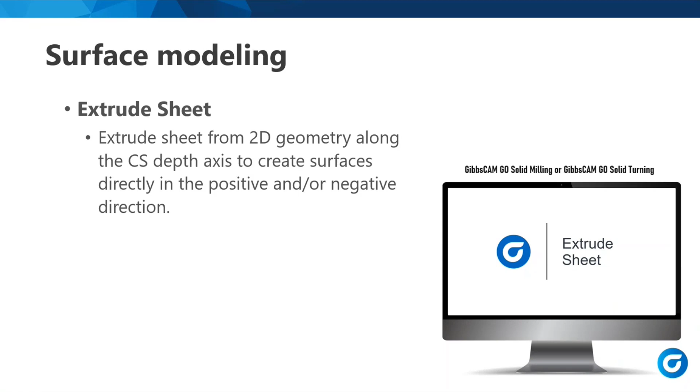So the first topic we're going to talk about is surface modeling. We added a couple things here, and one of those things is extrude a sheet. Now we can always extrude a solid, but never a sheet. So in this, if we can keep moving here, Vic, what you're going to see here is we put together some nice little things here that you can go back and look at. They're going to be, I believe, on the web. So basically, any piece of geometry, doesn't matter what it is, lines, splines, circles, doesn't matter. In the surfacing palette, we have a new button. It allows you to extrude into a sheet. And we can always do a solid, but never a sheet. So basically, it works the same way. Pick the geometry, and off you go.

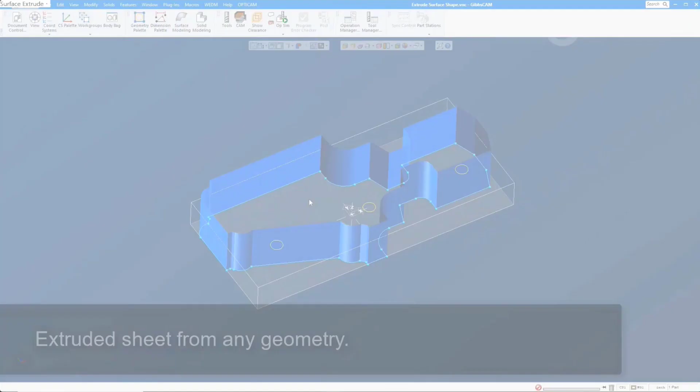Now, in the new wire EDM, this becomes important because we're using cylinders as sheet cylinders as start locations. So this is going to be very nice functionality. It's very cool.

Create a plane. Again, staying with surface modeling, if you've ever tried to take a piece of geometry and just build a surface over the top of it, or a plane over the top of it, to seal off a hole or a cavity, we made some changes to that, so now you don't have to do a bunch of work. So the way this whole thing works is, if you have some geometry like this that is not in the current coordinate system, in the surfacing palette, the very first button's a plane.

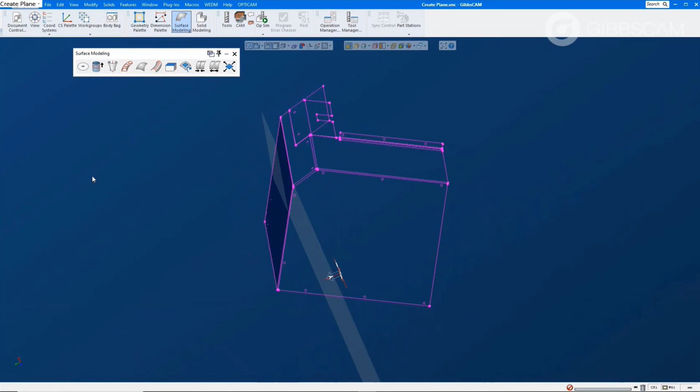Before, what you'd have to do is create a coordinate system on that point, on that geometry, make the geometry part of that coordinate system, and then create a plane. You don't have to do that anymore. As long as it's not on the current coordinate system, it will go off and trim it automatically.

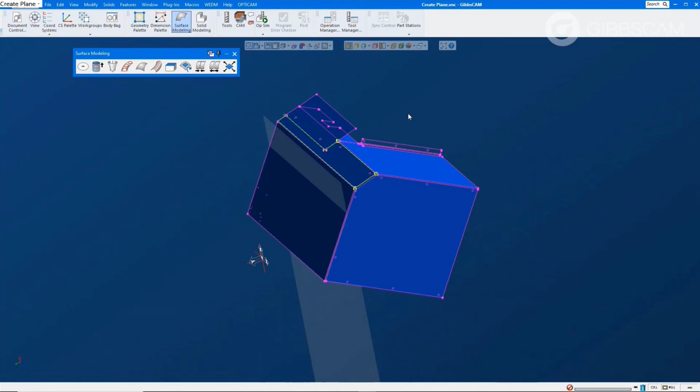So this is very cool for anybody who does this kind of stuff. I do a lot of machine sim building, and this becomes a very handy tool to patch up things or just make some simple surfaces that you can then extrude into a solid or do whatever you might have to do. So this is a very nice tool, made it really simple.

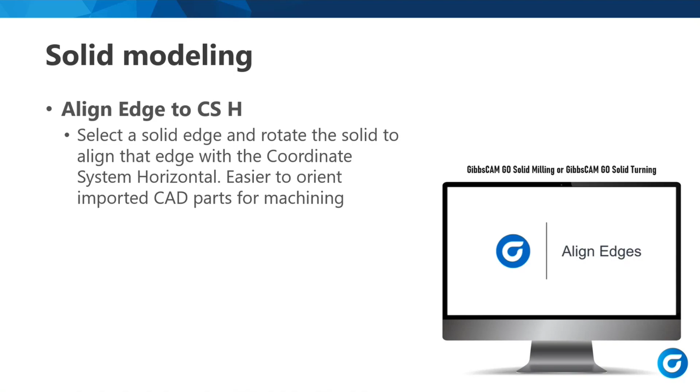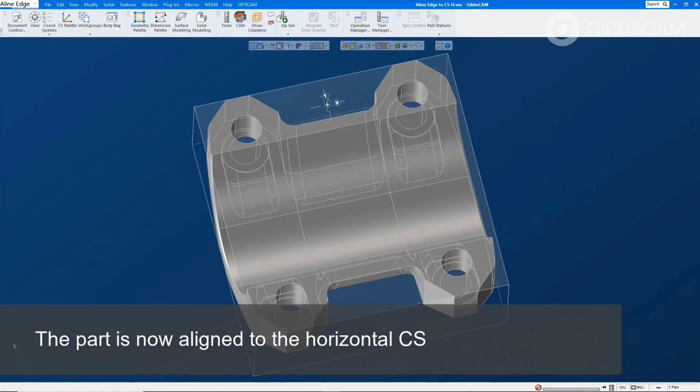Now with the new align functionality, you turn on the edges, you click an edge, and you get a right mouse click that says align the edge to CSH. So it always aligns it to the horizontal axes, but at least at this point we got the part in some orientation that we can actually use. Now you can align the surfaces and do some other things there as well.

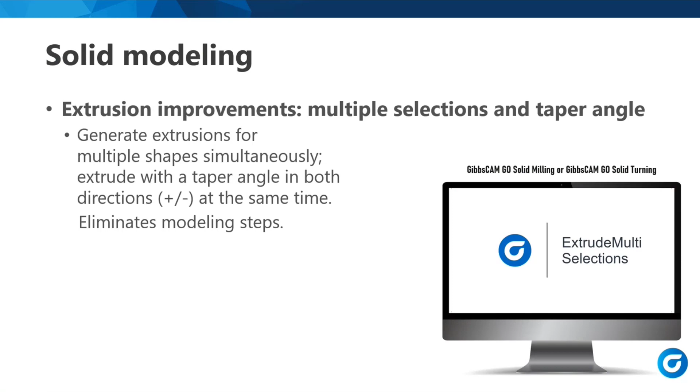We've always been able to do multiple selections to create a solid. The issue has been that you had to select the geometry in the proper order. Okay, so we have made some changes here.

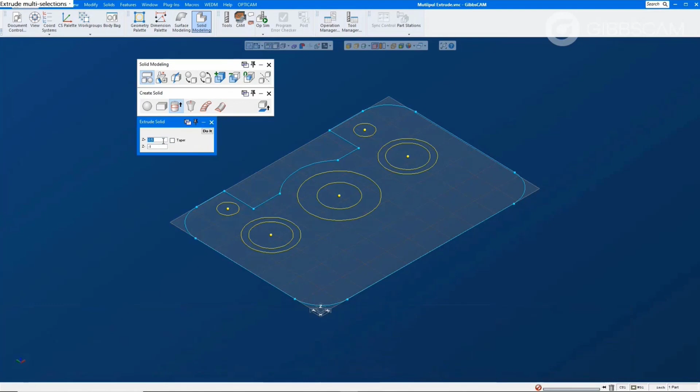You can see we added taper and you can go plus or minus, which we've always been able to do. But the key here is that the order of selection now doesn't matter, and that was always the problem. I mean, you could do this and it worked all day long, but if you didn't work from the outside in, it didn't work. Now it doesn't matter.

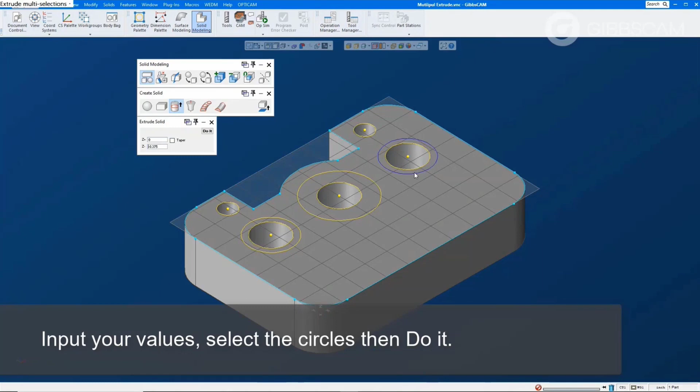We're just going to go through and build this whole part, I think it's kind of cool. The other thing that's kind of nice here is that we have two separate pieces of geometry, so we create two solids, but they become multi-lump bodies. So it makes it easy if you're building parts like this.

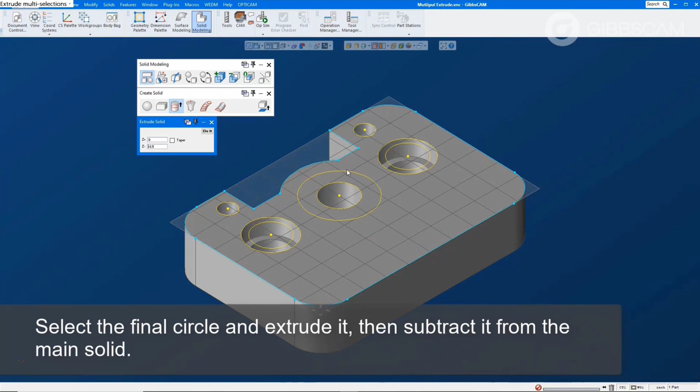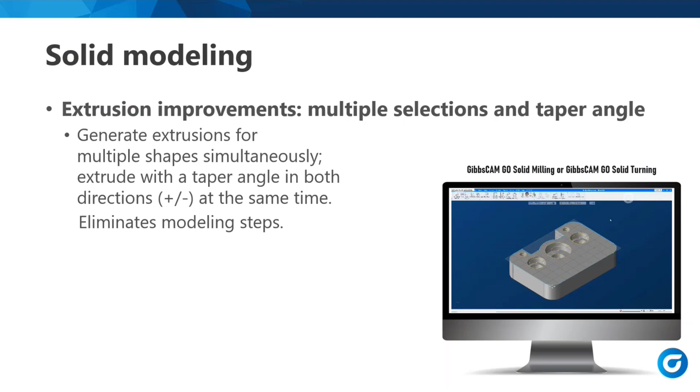Say I want to do 10 circles and subtract them from something. I can pick all the circles, extrude them, and they automatically become a multi-lump body, making it much easier to remove them. Or you can do one at a time, so it hasn't changed at all. So a couple different things here make it really nice to create solids pretty fast with geometry now, plus you can go plus or minus, and there's some taper stuff in there too.

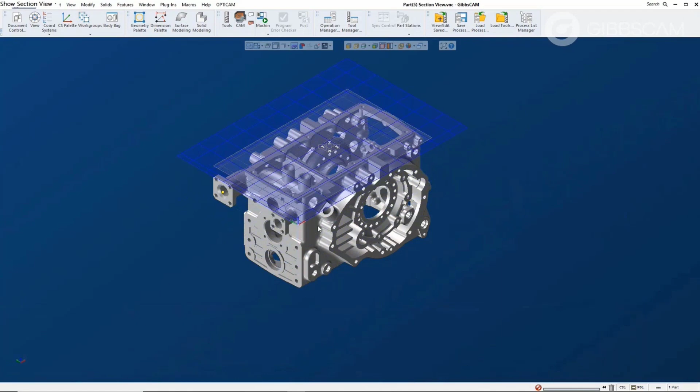All right, so section view. What does section view do? Well, this is something that allows us to slice through a complex model. So in the floating toolbar, you'll see a new icon there. If you click on it, you select the grid, the world there, and you see it turns blue. You can then drag this through the model and get yourself a section. So if there's some area in the model you're trying to see, or whatever the case may be, you can drag it through.

You can also put it in an explicit point. So in this case, I just have a point on the screen. Now I can see at that exact level and slice through the model. Okay, so maybe I was looking for something, I don't know. Having trouble, or maybe want to see inside of a part, I don't know.

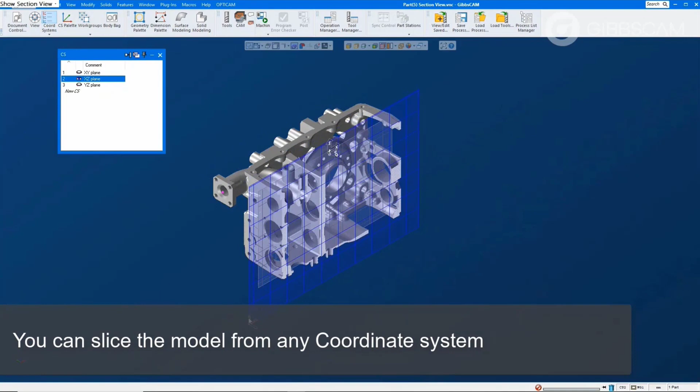Works in every coordinate system, or any coordinate system that you create. So in this case, we just have the standard coordinate systems, but if you would create one on an angle or deeper inside the part, whatever the case may be, it works throughout without any issues. It's pretty nice functionality to get in there and see the inside of a complex part.

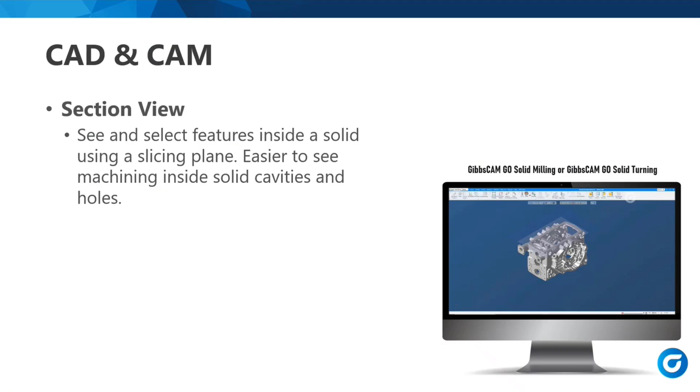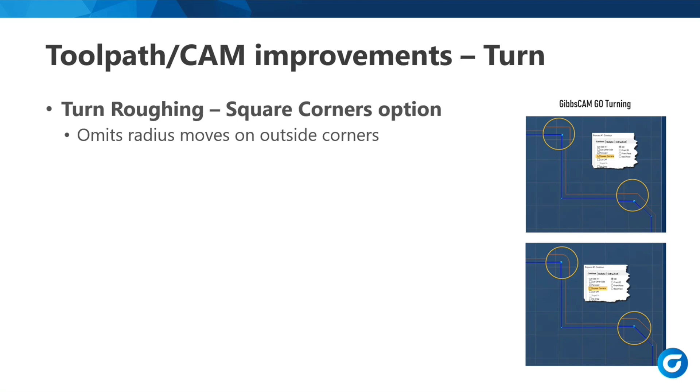Let's talk about a couple of tool paths. For turning, we've always had a radius on the corner in our toolpaths, with no way to make it sharp. Now there's a simple switch inside the dialog that lets you change it, and you'll see the corners are all sharp now. Instead of going around the corner, you get a nice sharp move.

Now this one is really nice. They've taken a few different things and combined them together, which is really handy.

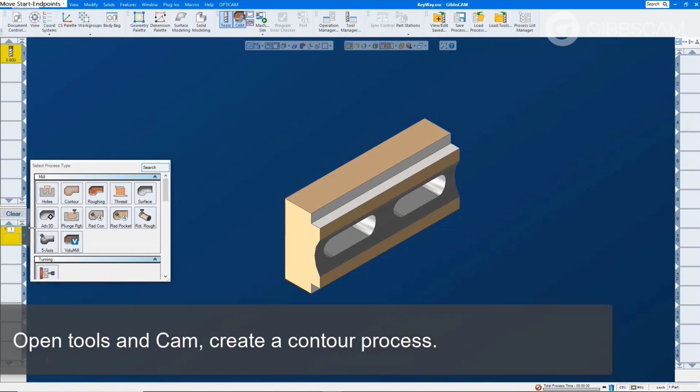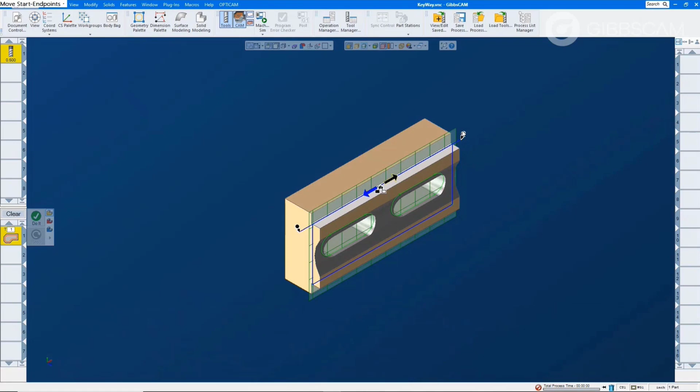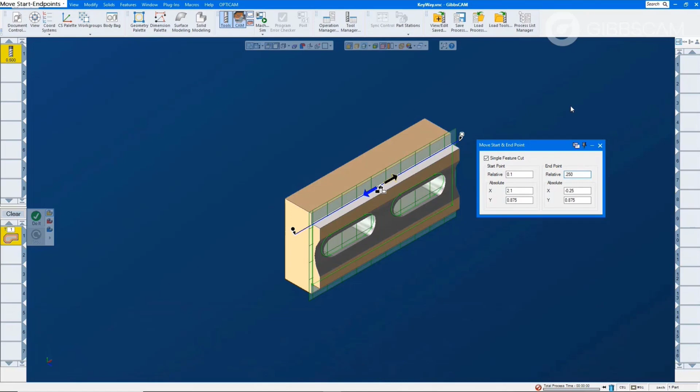Typically what everybody does, let's create a simple contouring process, then turn on the profiler to cut this slot. We'll drag the markers. In this case I just want to cut that top edge. So what we've done is move start and endpoint combines the functionality, so you can say I want a single feature relative to the start and relative to the end, which is very nice. Or if you knew absolutely where it was in X and Y, you could type that in. They give you a couple more choices and put it all together in one dialogue, which makes it really nice. That's a great added piece of functionality.

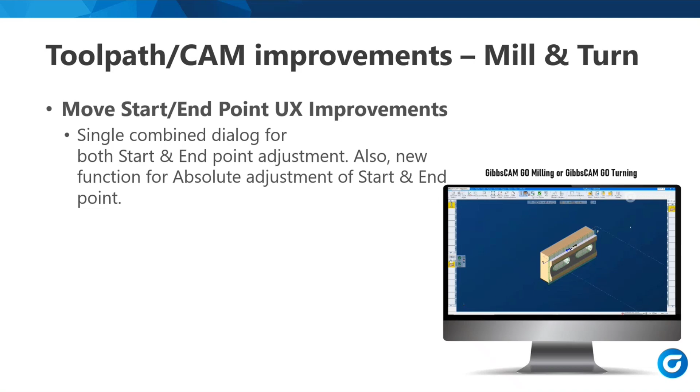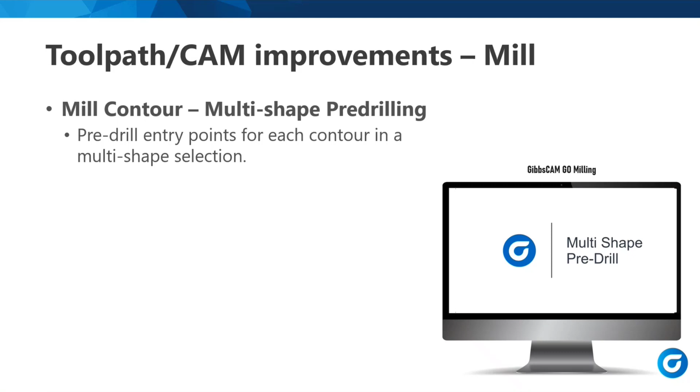Multi-shape pre-drilling is something people have been asking for. I've been with the company a long time. Here we have some geometry, and you could always pre-drill with GibbsCAM, but with geometry you could never really do it with multiple pieces of geometry.

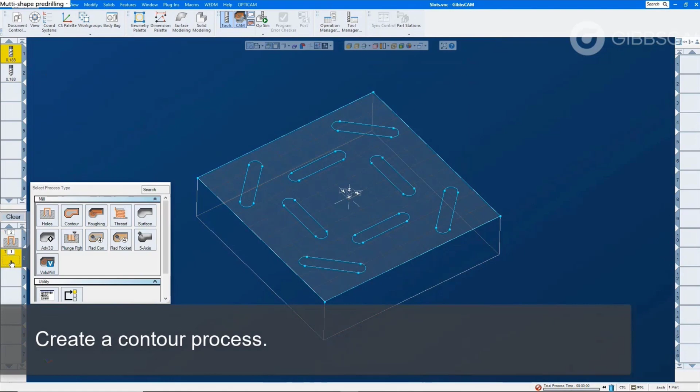In this case I'm just going to set up what I would normally set up as a pre-drill. It always works with solids because that makes it pretty simple. We'll set some depth just to have something, and you all know we changed the way we do offsetting, so you can choose what side, inside, outside, whatever you want. Then I'm going to go along and just pick the geometry.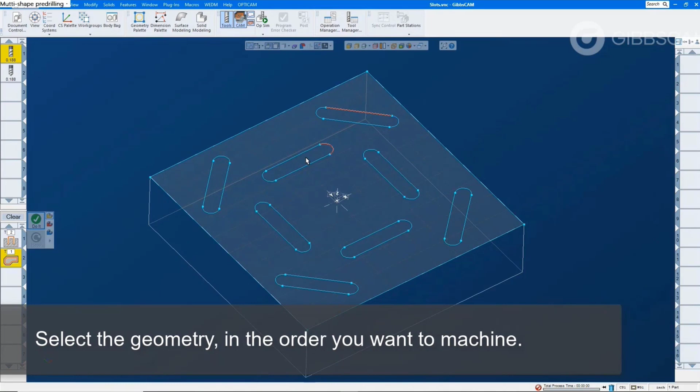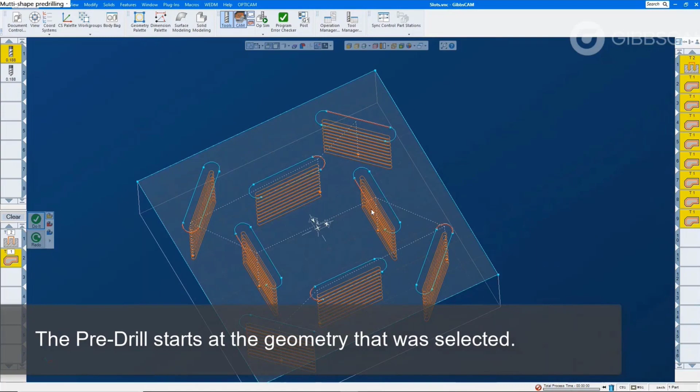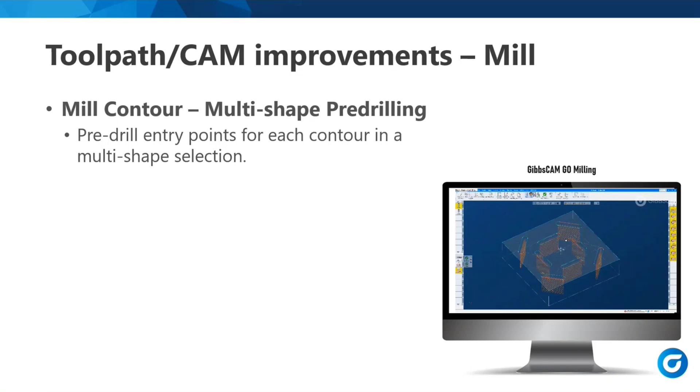Now, pay attention to how I pick the geometry. If I pick that line, and that radius, and that radius, and that line, and that line, and the radius, and the radius, and that line, then when we run it, pay attention to where the point starts. The drill starts on that line, or at the radius, or on that side of the line. So it matters which piece of geometry you pick — it determines where it's going to start, which I think is really cool. You can pick and choose what you like to do there.

This is very nice — massive improvements in the VoluMill. The toolpath is definitely faster. So when you have a part like this, the time it takes to actually generate the toolpath is extremely faster. That's pretty cool.

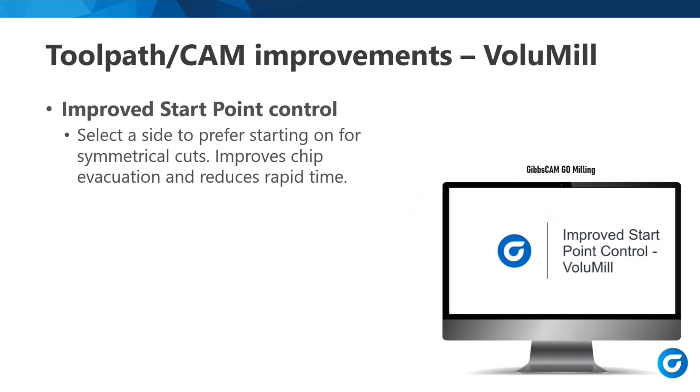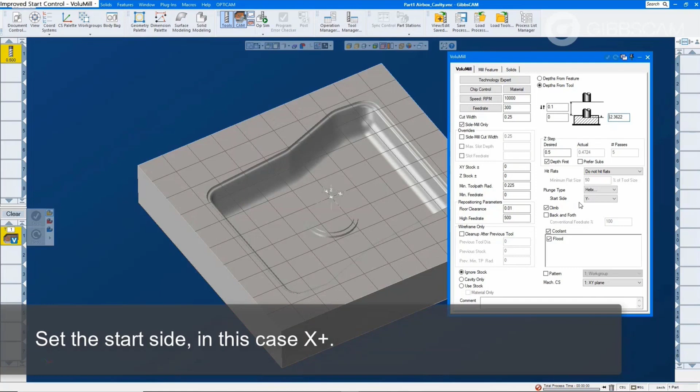The other thing, staying with VoluMill, is improving where it starts. This isn't going to be 100% — I'm not going to lie — but at least it gives us a hint on where we want to start. They've added something here because of the nature of VoluMill. We'll set our depth, and do normally what you'd do with VoluMill, but now down here we have a start side. I want to say start on the X positive side all the time — no matter what I do, start on that side of X, or it could be that side of Y, whatever. I just happen to choose X, and you can see the helix is on the positive side of X.

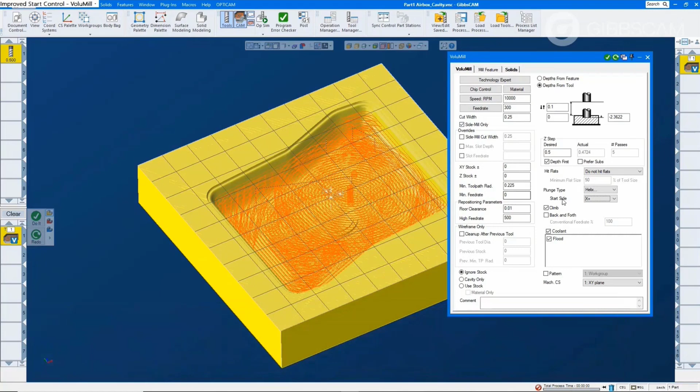Let's show you that it actually works. We'll change it to X minus, and we'll redo the toolpath.

And you can see it's pretty fast actually, because that's actually real time. We didn't cut that up at all. And now you can see that it's on the other side of X. So, nice functionality, it's going to help you out a lot. I know a lot of guys use VoluMill, so I think this is really nice.

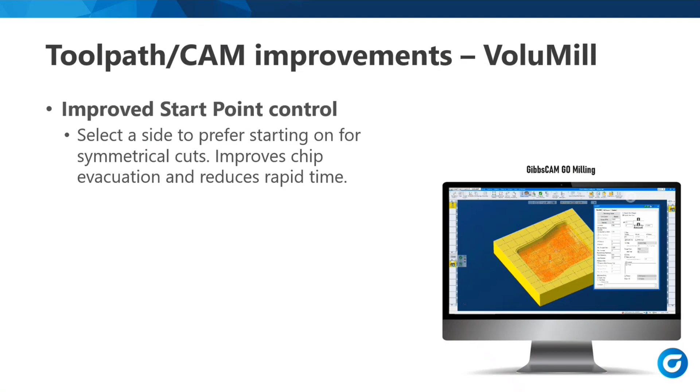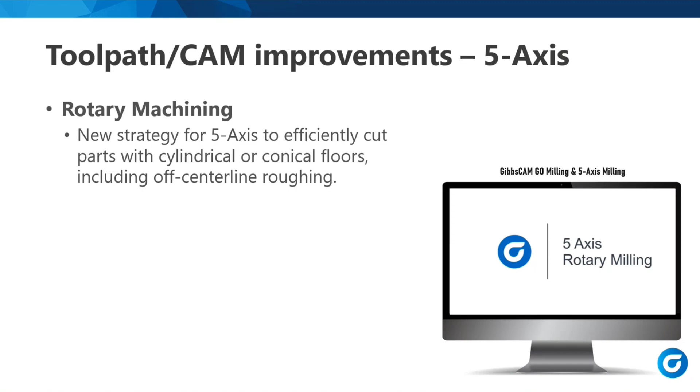All right, 5-axis. This is brand new functionality. This rotary machining is really, really kind of slick. If you're doing any kind of screws, big threads, this is really, really nice.

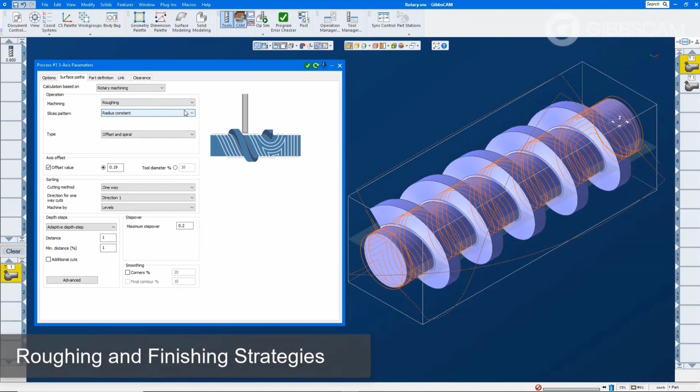Now, we want to keep in mind that this is for roughing, not necessarily for finishing. You have a rotary machining roughing. You can do radiuses, this is kind of neat to mess around with. You can do spiraling or just offset, it just depends what you want to do.

The really nice thing here is the ability to offset in Y. And everybody thinks that, hey, let's make these screws, we'll just cut it on center. Yeah, not so much, a lot of times that doesn't work.

So here we're going to pick all the surfaces. You can set the axis of rotation, so depending on what type of machine you have, how your axis is set up, and it will go off and generate a really, really nice tool path.

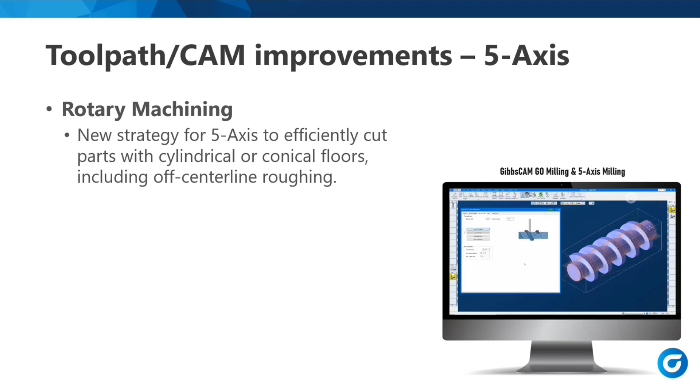So for deburring, also in 5-axis, this is very cool. This is something I think it needed from the beginning. And the fact of the matter is now you can do a step over, so you can either do it a constant width or a radius. It just depends what you want.

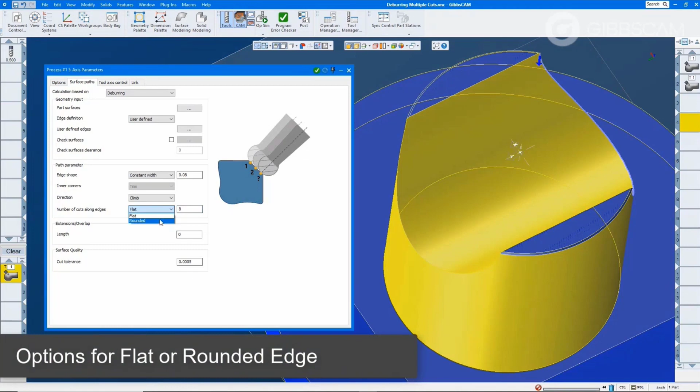So in this case, we're just going to do a flat and we're going to say 8 cuts. Now, it's not going to give you, like if you want an 80 thousandths flat, it's not going to give you that. It's going to take 8 cuts and divide it up and give you what it gives you. But at the end of the day, you have a choice of either a flat, which is it's cutting right now, or actually it's going to cut a radius, which again is very cool.

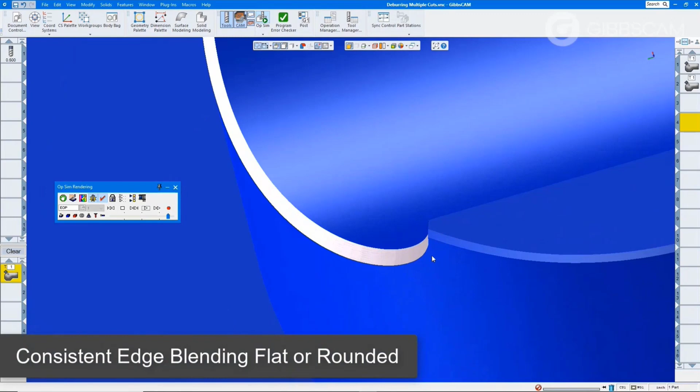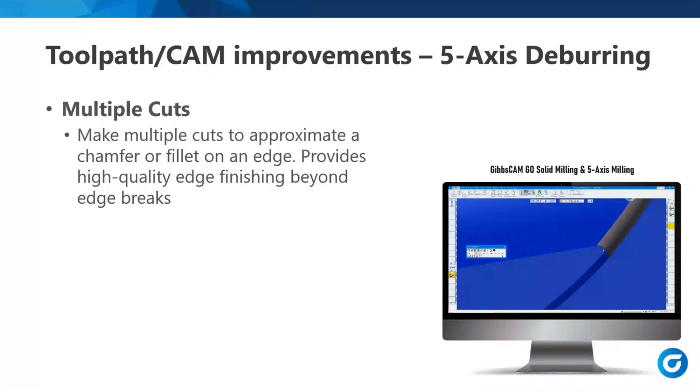So now you have a choice, so it's either a flat or a constant blended edge. This is a very, very, very nice improvement to the software.

Okay, contact point. What this allows us to do is to set a distance so that you can use the side of the tool to generate a deburring cut, as it were.

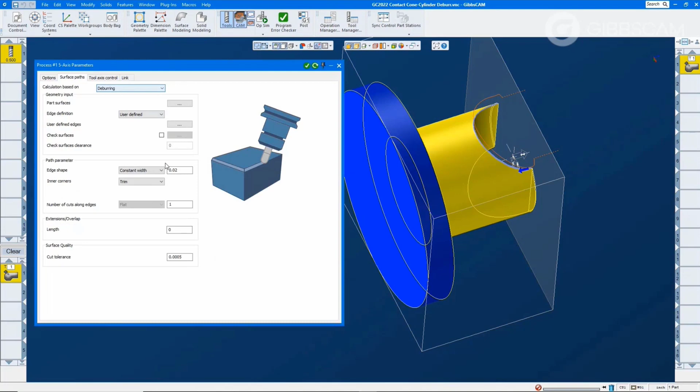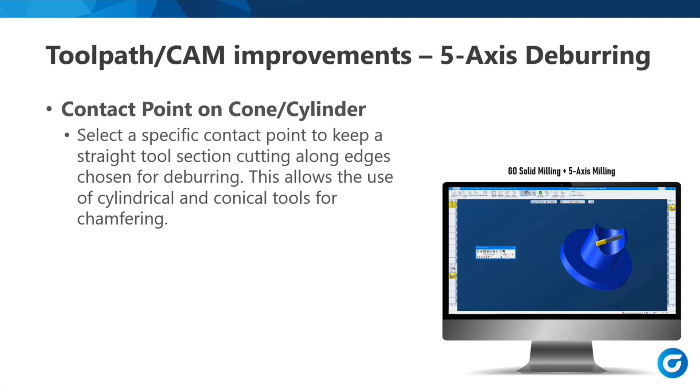Okay, so we're going to go in here. We're going to set this up, deburring, and make sure that it's set down here, you see? So what that quarter inch is going to be is past the edge of the part, or the end of the end mill is going to be a quarter inch past. And you can then use the side of the tool to generate the deburring, which is, I mean, people want to do that. So I think these improvements are going to be very useful.

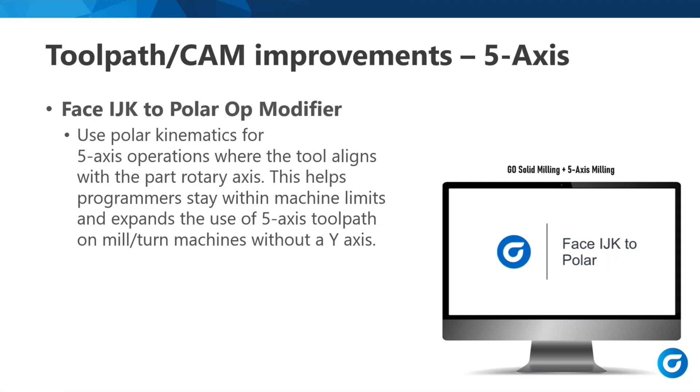Okay, polar IJK. Okay, this is a bit hard to explain, but basically if you have a machine that doesn't have a Y-axis, this will allow us to do it, and all these are basically deburring, allow you to do this without having a Y-axis on your machine.

So basically you're going to set it all up, cut it, tool axis control. It needs to be set up in three axis. And then what we have is an op modifier that you go in and you say, hey, I want you to change this. And you say, do it.

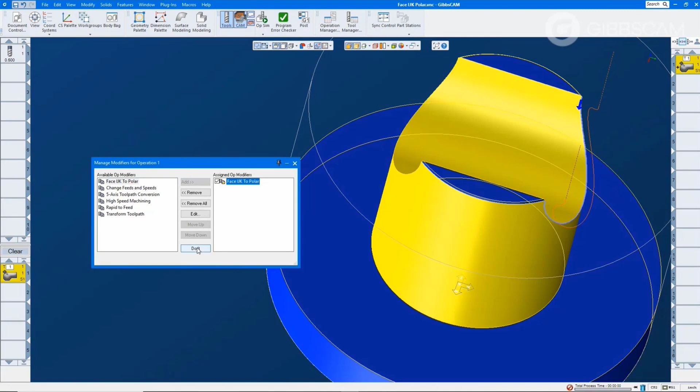And what that's going to do then, instead of the tool driving along, it's actually going to drive the rotary axis. So you'll see this in the simulation where the result is the actual rotary axis is moving, which if you don't have a Y-axis on your machine, it's not possible to do what we just did. So this at least will give you the ability for that rotary axis to move.

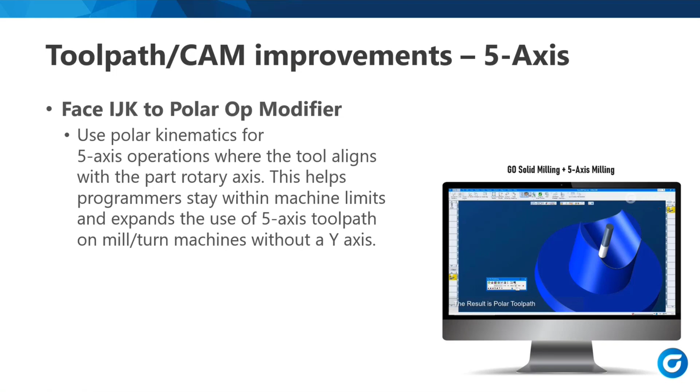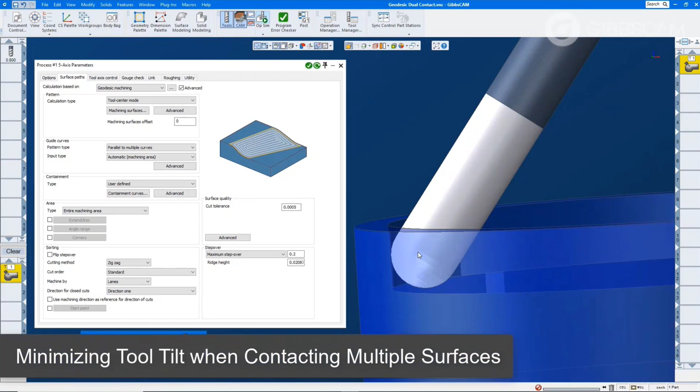Okay, dual contact. Again, this is one of these, when you're doing geodesic and you want to select two, like it's going to, the ball mill is going to touch two different faces. It basically adjusts the tilt. And a lot of these things are hard to show, I give Dan Arrington a lot of credit. Some of these things are difficult to actually show, very specific to specific things that you're trying to accomplish. So that just helps us keep the tool a bit more stable and minimizes the tilt.

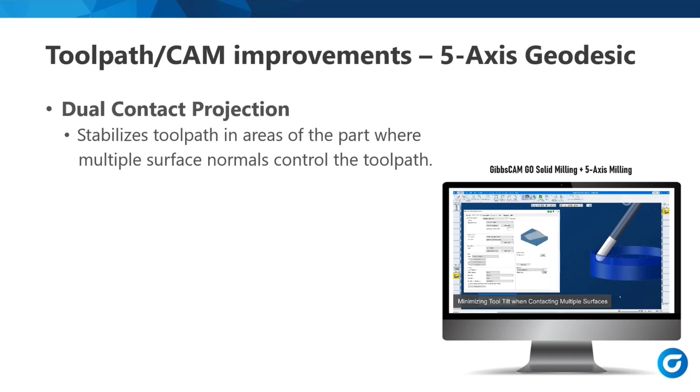Again, automatic tilting — these things are difficult to show, but for collision checking, propagation direction is kind of cool. If you use geodesic, this allows you to draw some geometry. Maybe you're cutting a surface and you only want to cut on one side of it. You can draw a line or a boundary and say I only want to do one side, not the other, and it does that pretty well. Or if you drew a box down the center, it would do either side of the box, or just do what's inside the containment shape. That's a really nice piece of functionality if you're using geodesic.

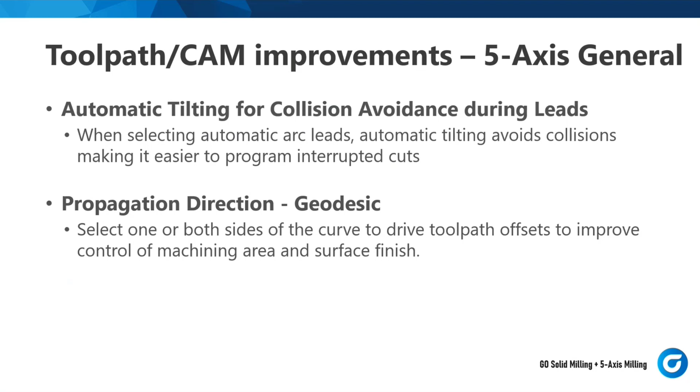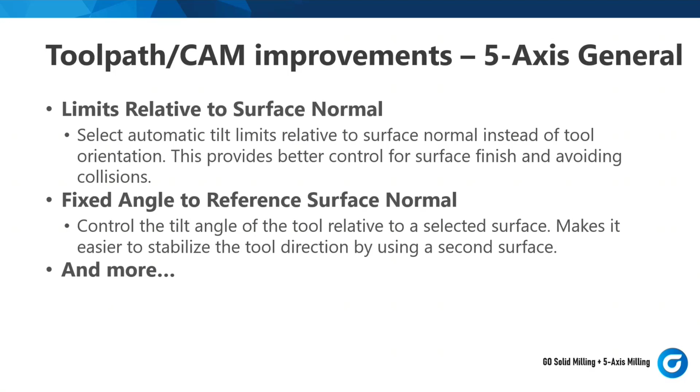Again, these are all surface normal tilt limit things. If you're really into this, trying to get these things dialed in, you can get in there and mess around with controlling all the tilt angles and all the different things in 5-axis. There's a ton more little odds and ends in there that you can read in the documentation and go through. The big ones are the rotary, the deburring, and the geodesic stuff, which is really, really sweet.

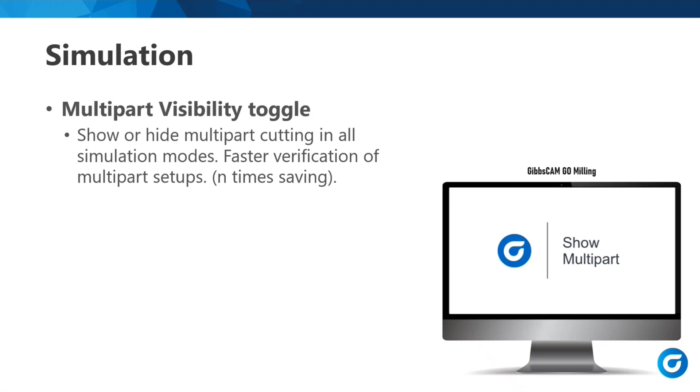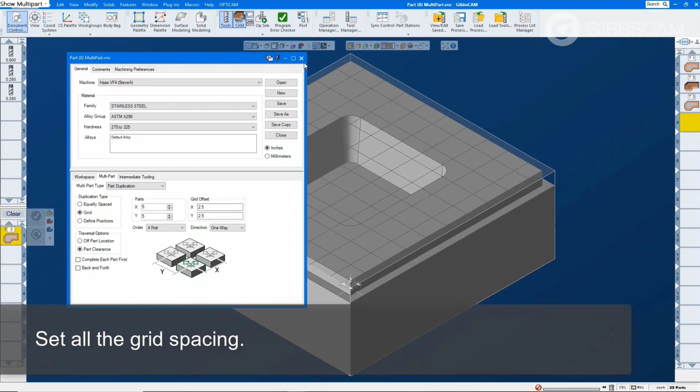All right, simulation. This is something people have asked me a thousand times for, so we've added something in the simulation that should help. Let's say we have this part, a simple part — most generally when we're doing this kind of stuff, they are simple parts. Maybe they have lots of tool paths, or maybe in some cases you have 100 parts in a grid. Well, I really don't want to watch 100 parts render because I don't need to. I only need to make sure that the first one is right.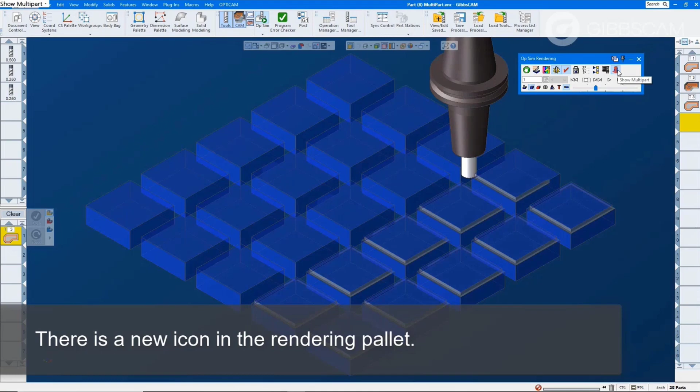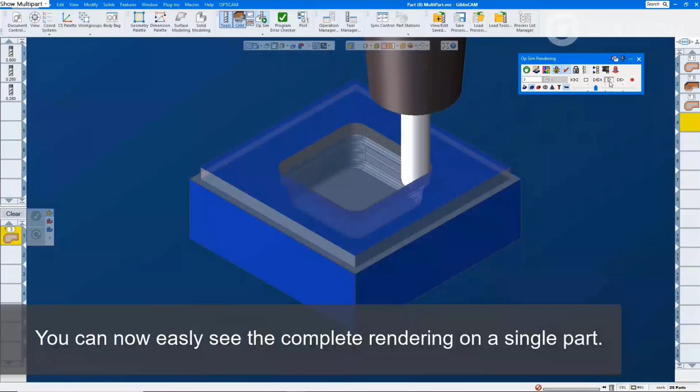So you'll see in the rendering it looks like a little tombstone. If you click on that, it turns all that off, so you just have one single block. Everything is still there — it just turns off all the rest of them for rendering purposes, and allows you to go in and just see this one block. This makes it really nice so you don't have to watch, and it works in tombstone management — it works everywhere.

Okay, again for turning, we've definitely sped up the sub-spindle machines, so the 3D material on the sub-spindle is much, much better. We've also sped up the simulation for MTM, and also faster start at op. I think that's what we're going to talk about next.

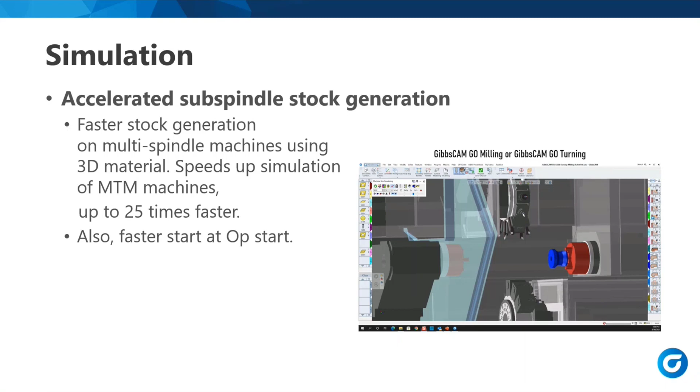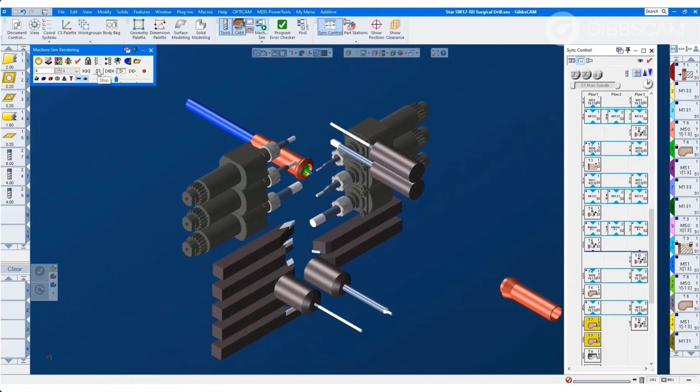Okay, so start at op — this is very cool now. We've always been able to do this a bit with milling, but not much with turning. What this allows us to do is set an operation up. Let's say you build a bunch of tool paths, but I don't want to see the whole thing run — I see part of it, I know it's good, I only want to see the end of it.

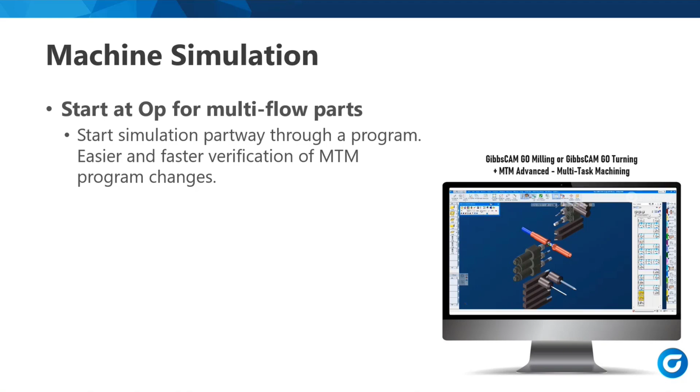So now in turning we allow you to go in and set a stop, so it will jump to that operation that you say, hey, start at this operation, and we'll jump there. Everything before that will be shown rendered as a completed part. We never really did it in turning — we've had it in milling, but not so much in turning. But now it works across the board, and it works pretty good. I use it all the time now. It's very, very nice.

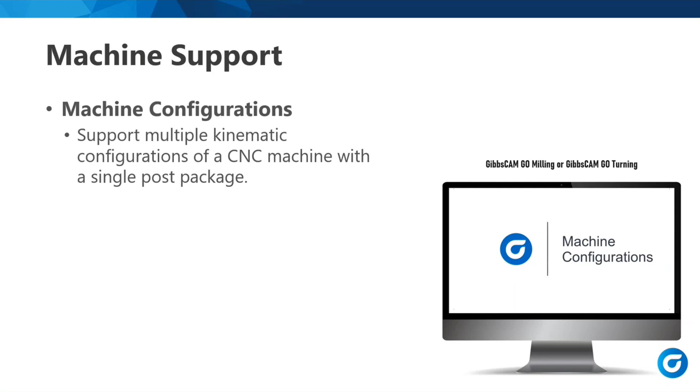Okay, machine support — what does this mean here? Machine configurations. Now this is another really big part of the kinematic part of this release. Part of this is if I have a machine that has multiple configurations — meaning, in this case, a machine that may have a trunnion. But that trunnion doesn't reside on this machine all the time. We've given you a configurations button.

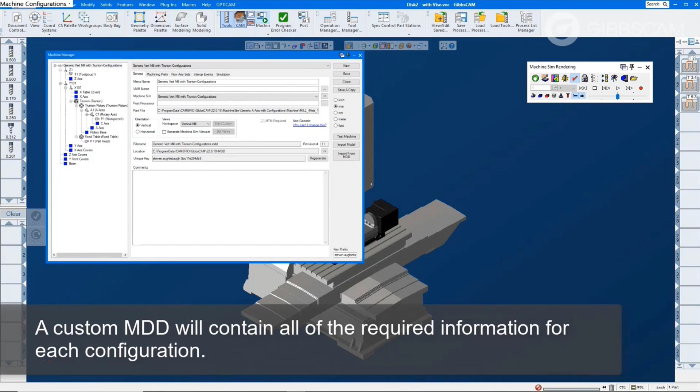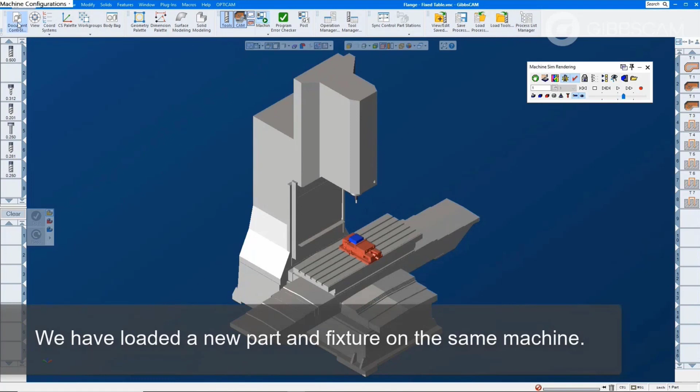The MDD is what handles all this stuff. So in the MDD you would create a configuration that has a trunnion, or nothing, or angle plates, or whatever the case may be. In this example, this is just a 5-axis trunnion that we're running today, but maybe tomorrow we need to tear that off and just put a vise on there. In the past, you would need a whole other machine sim, a whole other MDD. Now we just switch to a fixed table, and now we have a completely different configuration. So one setup of machine sim, one MDD, one post, and you're good to go. This is really, really kind of cool.

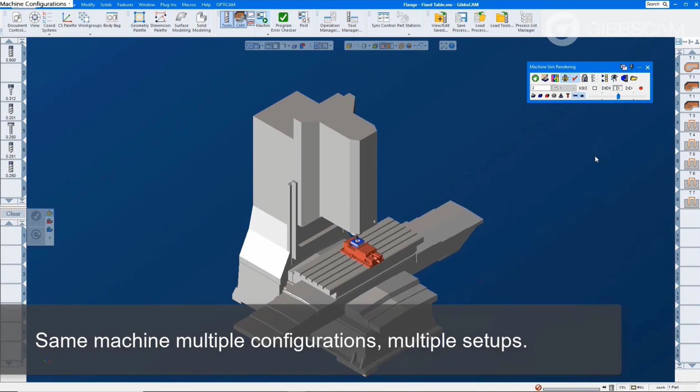Okay, and this is for a simple machine. Well, let's say we wanted to talk about the really complex stuff — and a shout out to Andy, because I didn't do any of this, I'm just talking about it. So in this case, we have multiple configurations.

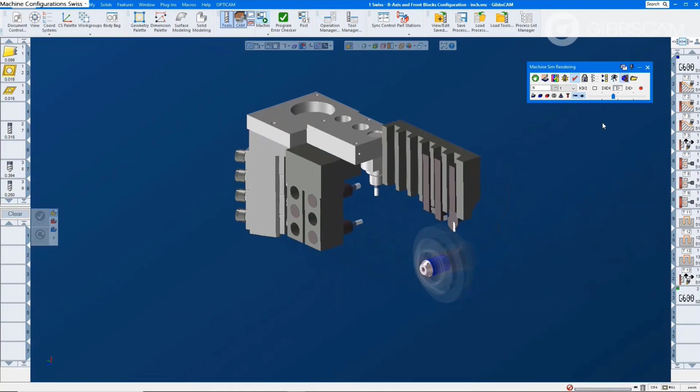Okay, so we want to show that we have tools, we have tool blocks, we have B-axis on this Swiss style machine, and we're just going off and rendering it, and that looks pretty cool.

So on the next setup, maybe we just have a thread whirler. We'll go in and say, hey, no tools, just show me the thread whirler, that's all I want to see. So now you see all this stuff got taken away.

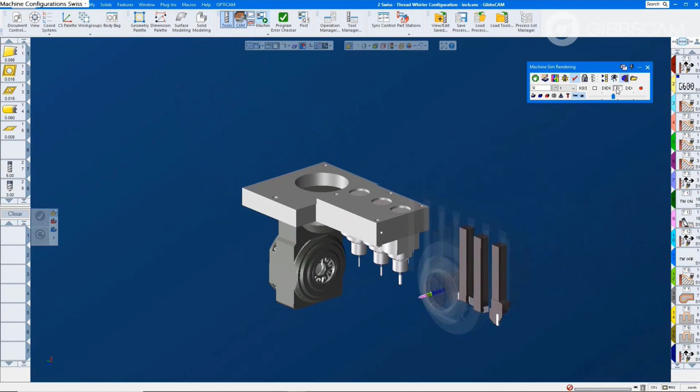Now in the past, you would have had to have a whole other setup, you would have had to have a whole other MDD. Don't have to do that anymore. This is very, very cool functionality here. This is really, really powerful stuff.

And again, I'm going to switch it back. Let's go ahead and put the B-axis back on. Again, just trying to show you different combinations of things that you can have for this configuration stuff.

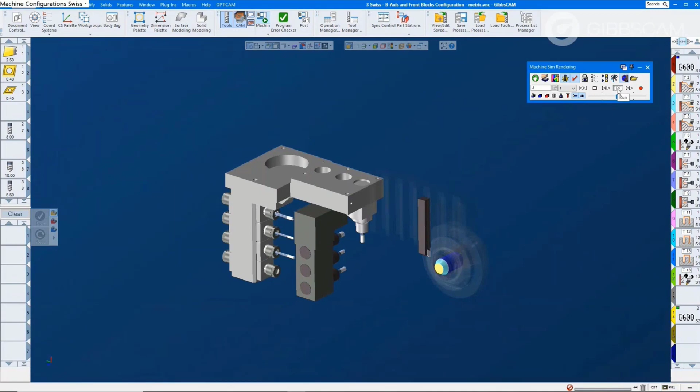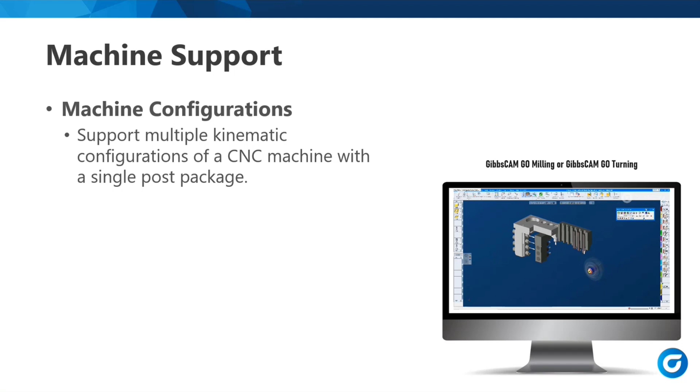It's very nice. Again, you have to go in and do some things in the MDD, but at the end of the day, if you're doing this type of stuff, you have multiple configurations. You want to do rotaries or angle plates on a machine, or whatever those cases may be. In this case, we're changing B-axis and all kinds of really cool things. Works really well.

Okay, so for milling machines at the moment, we do a lot of stuff now with these mill-turn machines, where you have a mill that has 5 axes on it and it can do turning. We can now go into the MDD and switch on.

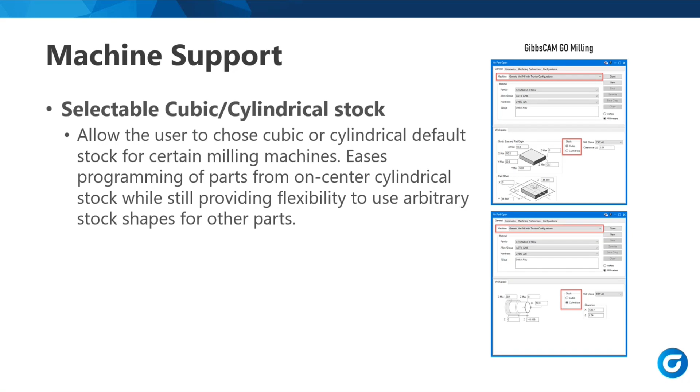So on the milling machines, you can have cylindrical stock automatically. As you can see, you can pick either cylindrical or a square piece of stock, which is kind of cool. Otherwise you have to go in and create the stock and do all these different things. In this case, it basically takes care of it for you.

Okay, that is the highlights of this version of software. So I went kind of quick, but I think it's really, really nice, solid pieces of functionality in this version of software.

So, question that I have from Eric: is there a way to organize the operation tree with folders? It gets pretty busy if you have lots of operations and work coordinates. At the moment, no.